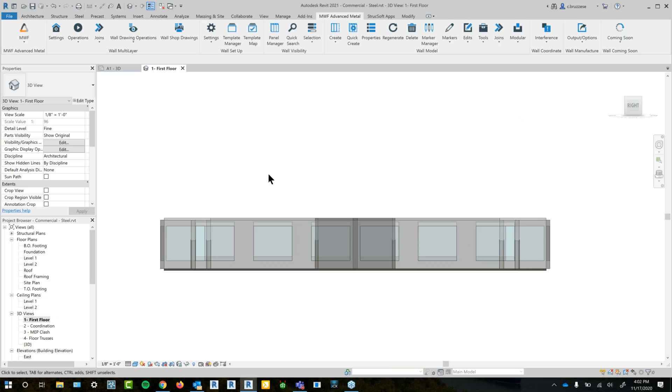So since we are sticking with metal today, I thought we could go over this pretty simple commercial building and go through some of the basics of MWF and how to get started. For anyone who's brand new to the software, MWF stands for Metal Wood Framer.

Like Tanya mentioned, products come in both types. And we basically convert, in this case, I'm going to stick with walls. I'm going to convert some of these walls into panels.

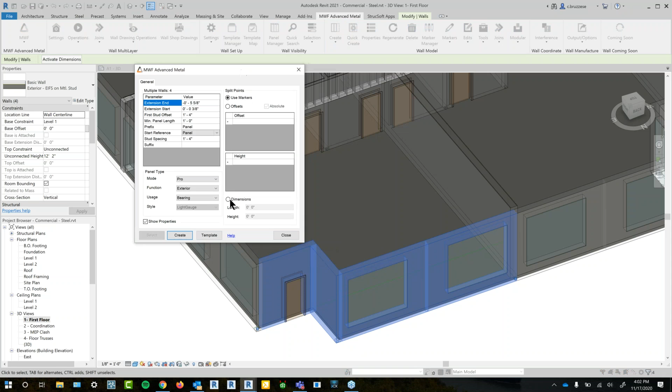So MWF at its core is what we call a template-based software. The idea is that you can take these templates, we'll give you some default ones out of the box with the software, and you can convert these, copy them, customize them, make them your own and build them up to your own standards.

So I've already got some templates set up that I'm just going to go ahead and activate. And when I go ahead and say create, it's going to convert each of these walls into singular panels. It'll do the framing automatically. It's going to recognize the openings that I've got set up in here and frame out according to my templates.

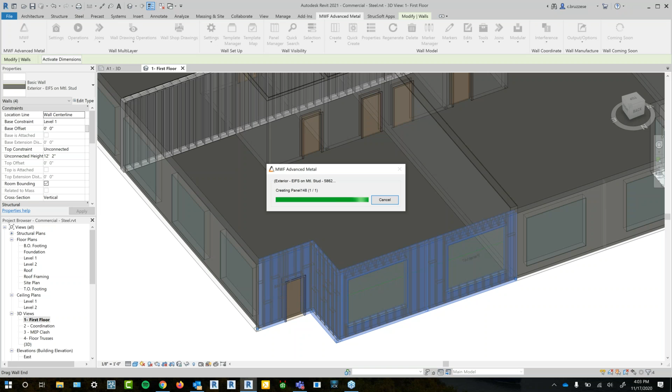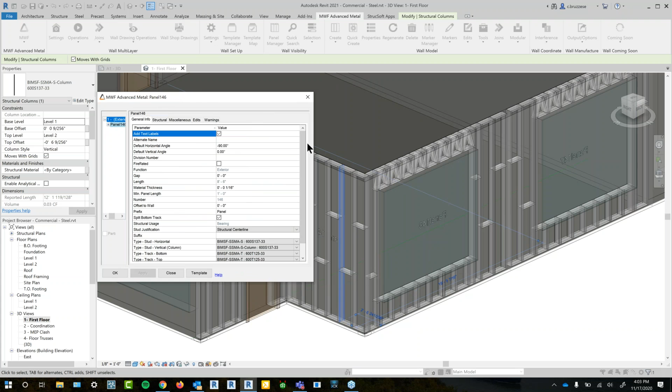So if I just go into the properties, this is basically the main brain of the panel, if I can call it that. And this is exactly what you can save to your template. So we're just in Revit, so you just load in the Revit families that you need, verticals or structural columns, horizontals or structural framing. So you can load those in, choose what you like.

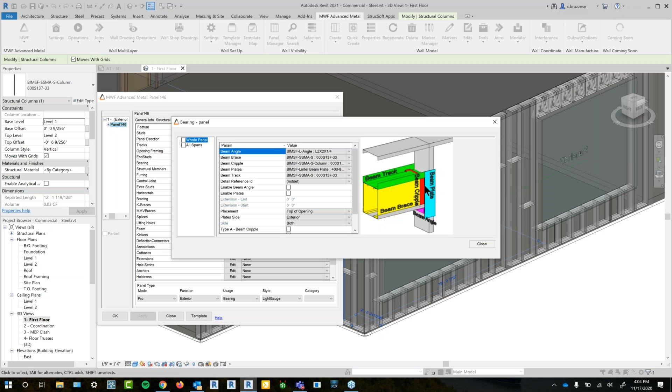And then if we get into some of the metal options, if you wanted to add in bearing headers, something like that, or add in maybe some blocking like I have in these panels here. These are all things that you can customize within MWF, within this properties window.

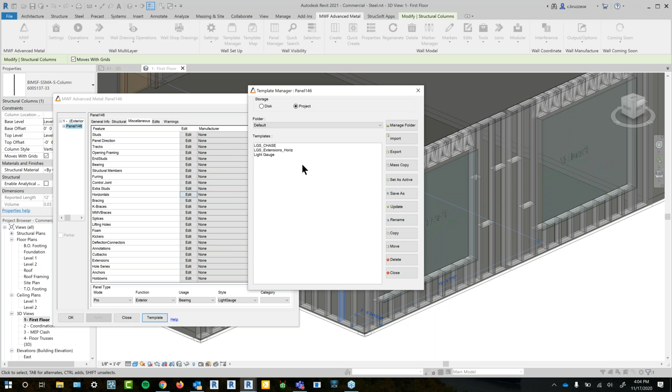And then the idea is that once you have your basics set up in your template, you can go ahead and save this, reuse this throughout the project, and then you can even export this and bring it into other projects.

So that's the basic idea of the software. It's a little bit of legwork at the beginning, but then everything else should be pretty automated.

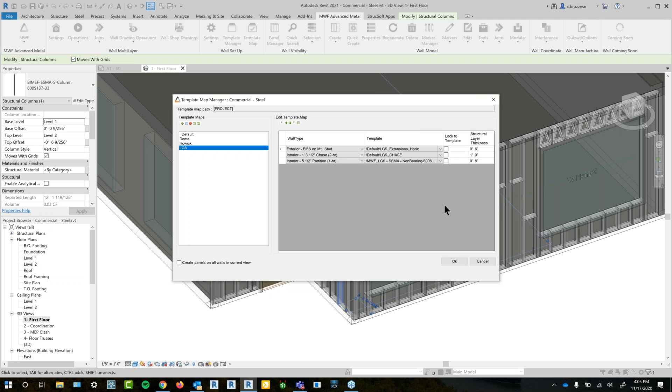And part of that automation is also setting up a feature that we call mapping, and we've got rule sets that you can set up as well. So I can start linking the templates that I've created to my Revit walls. And this is really going to kick in the automation of being able to grab a bunch of different wall types at once. I can use Quick Create, and then it'll all frame out automatically according to my templates and according to that map.

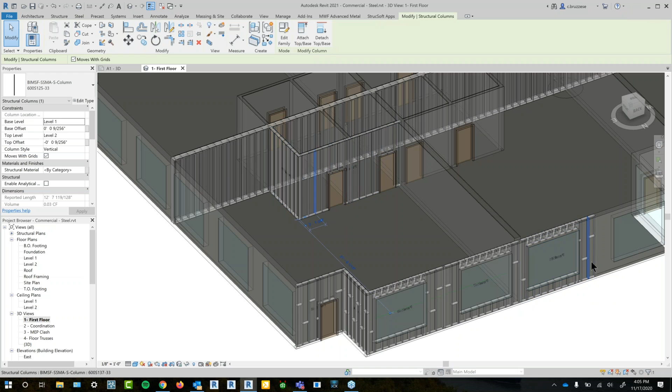So my interior ones and my exterior walls are getting different sizes of studs automatically with that template map setup.

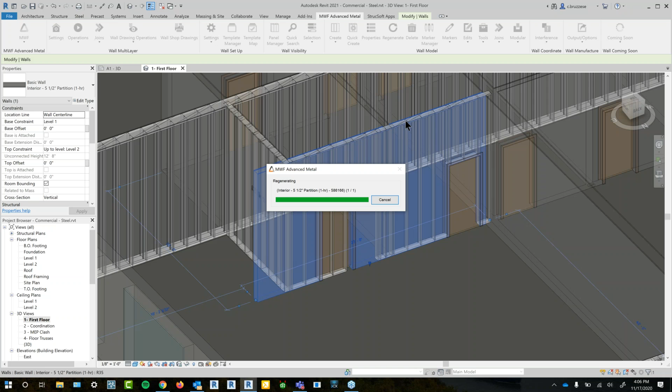Everything is parametric as well. So if you do have to move anything, maybe if I shift my door, if I wanted to change the length of my wall, I can drag it. There's a regenerate feature, which if you already have panels in there, gives your wall a quick refresh and it'll update with those necessary changes. So if anything changes on the fly, you can just give it a refresh and your panels will be up to date.

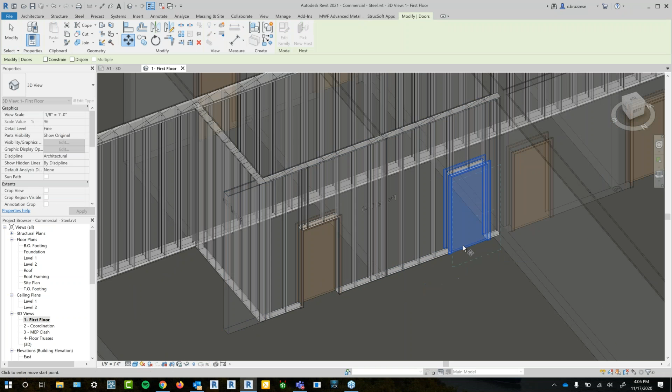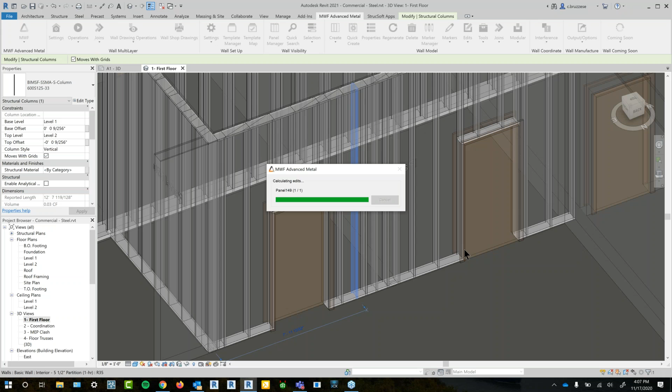So I have been talking about the templates a little bit and how everything can be automated. But since you are still in Revit, you can still do manual changes that you've grown accustomed with. If you want to use a quick copy paste, move some studs around, there is a slew of edits that you can do as well, where once you run our edits commands, it'll save these kinds of changes to the panel.

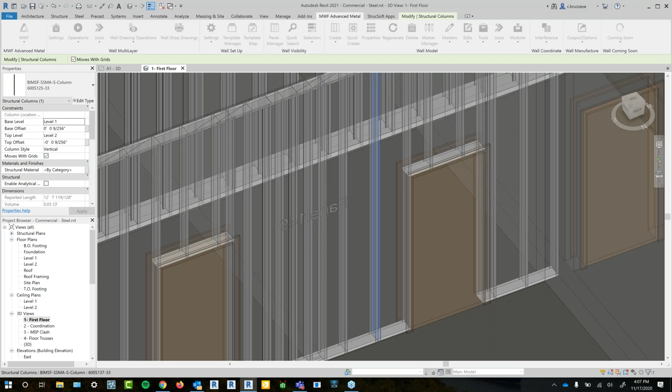I could also do things like maybe use our own edits if I want to quickly double something up. Maybe let's make this back to back. So I can do these kinds of edits. They're savable, they'll be regenerable anytime you move the wall around or change anything that can occur in the model.

And these are individual changes that you can make on the fly as well. So not everything has to be automated. The idea is that you do probably the bulk of the work with those templates, get the bulk of your framing in, and then you could always go in and do a little bit of manual modifications that you need.

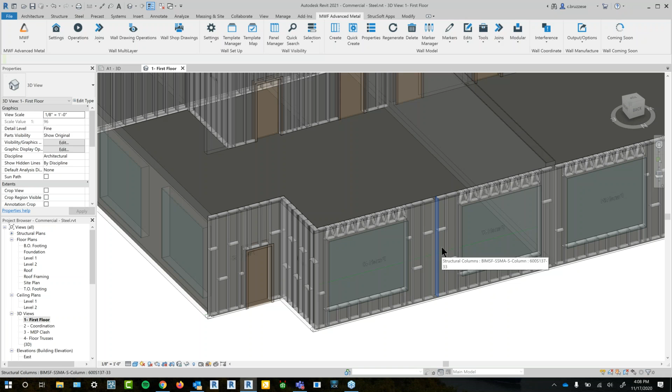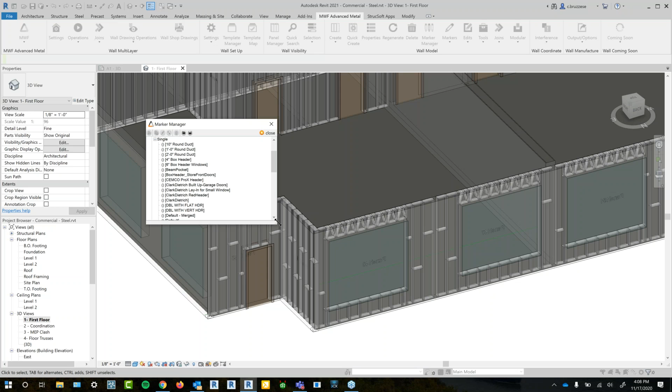The other aspect with the software that I want to talk about is this term that we came up with, called a marker. So you'll probably notice I've got some truss headers already set up. My walls are also joined together, and those are done with something that we bring into the software that comes preloaded, and that's called a marker. So it's basically preloaded information, kind of like the templates that you can duplicate, customize, and make your own.

So a good example is my standard truss header that I have here. It's just a marker that I've taken and I can duplicate and customize. I can choose the sizing of the families. I've got clearance options. I can choose the positioning of the cripples if I want it between the V's, inside the V's. So you can kind of customize this.

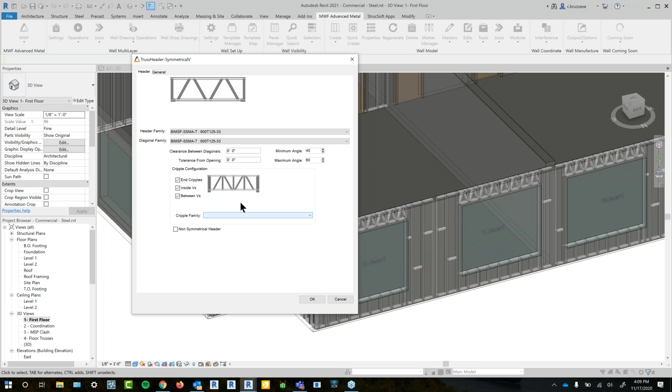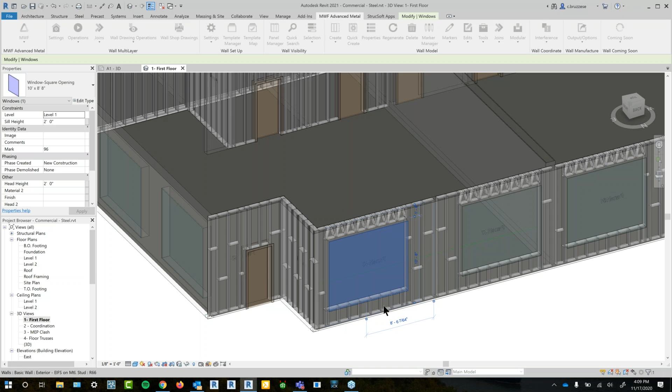And then all you have to do is grab your openings, apply it, and it'll take on that header configuration automatically. Same idea with it being regenerable. If I want to change this header on the fly, maybe put a box header in there instead, I can always go change that, give it a quick refresh, and then my panel updates with the new information.

So again, big picture with the software, you get your templates set up, you get your markers set up, and then the majority of the framing really should be done for you.

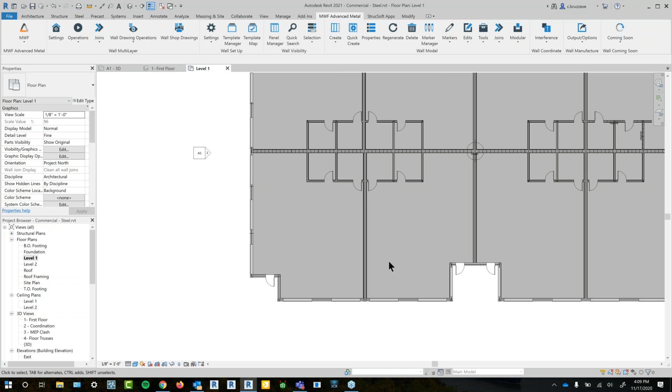With the opening markers in particular, I've kind of just been manually applying them, but if you do want to create rules, get that a little bit more, basically create them with a bit more intelligence. And then we do have rule sets that, again, you can build into your templates and it'll automate it just that much faster. So I can make rules for windows, let's say, that are 4 to 6 feet wide.

I can go so far as to say if they're on a specific level or in a specific Revit wall. And I can go ahead and create this rule, save it to my template, and then once I blanket create my building, all of my headers and opening conditions will be framed out automatically.

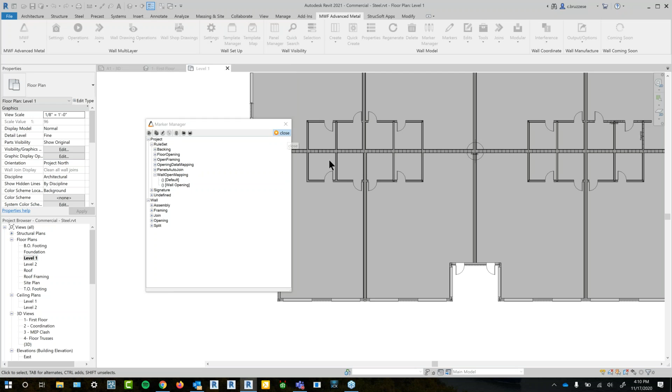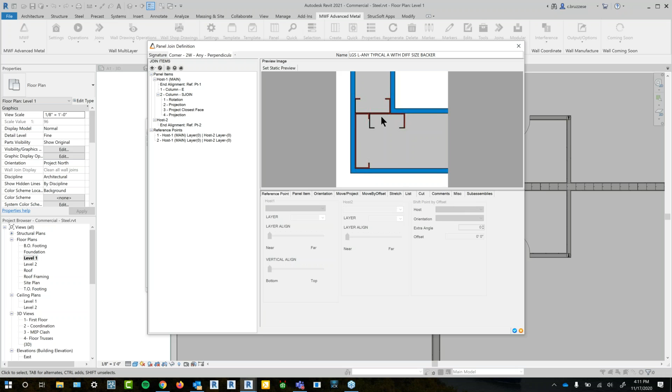So the joins that we use to join the wall panels together also have that similar kind of idea. They're preloaded information, so if you do have any kind of custom join conditions, chances are they come out of the box with the software, but we could always make these as well. These are super easy to customize, and you could always load them in.

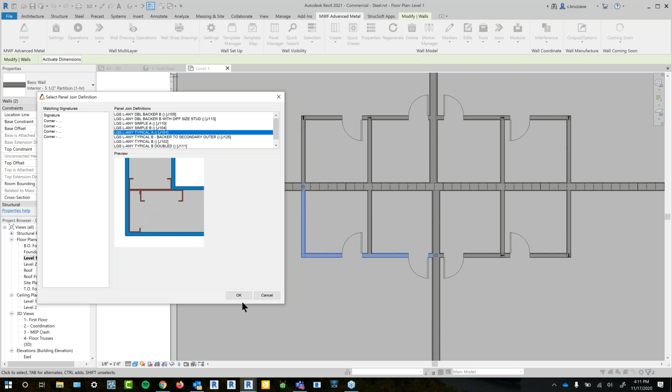And again, I can just grab a corner, place a join. It filters out that I've got a corner selected automatically and gives me the list to choose from of how I want that corner to frame. So maybe I'll pick one with this backer. I can say, okay, that's where I've got these arrows set up. It's just to designate that there's a join there.

And then as soon as you create these panels, you'll have that join configuration in there automatically, and you'll be good to go.

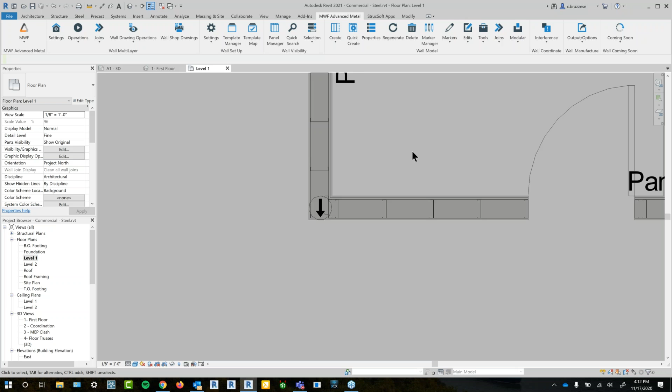So that is the framing portion in a nutshell, I'd say, at least in terms of the walls. It's really just getting your templates and your rules set up, and then you're pretty much free to grab your walls, say create. 90% of the framing should be done automatically according to the rules that you have set up. And then, of course, everything is exportable. If you reuse a lot of the same standards, you can bring that into other projects.

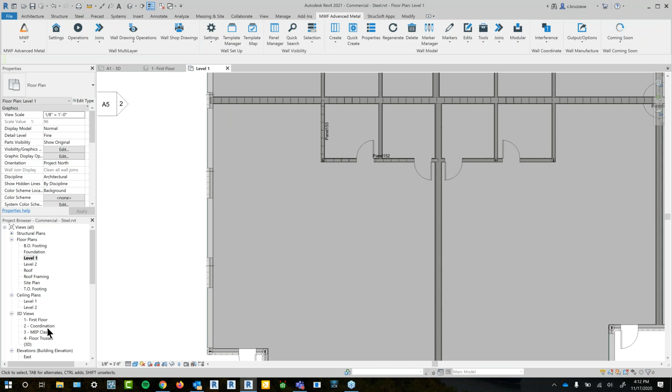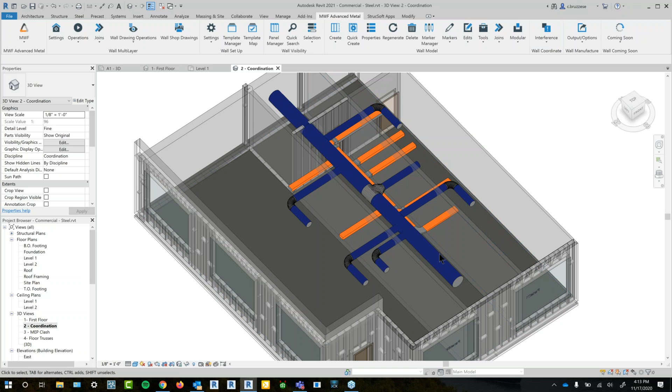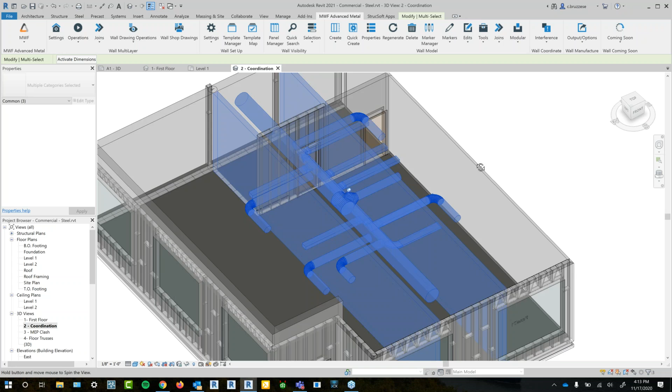Another aspect of the software we should take a look at today is coordination. This is another tool we have where if you have MEP or generic objects, a structural link, pretty much any type of object, you can bring that into your existing Revit model. In this case I have a link set up, and I can run our clash detection tool, which will look at the wall penetrations I've set up and create the openings for me automatically.

Anything on this list works, and as long as your link is three-dimensional, has coordinates, some kind of volume, and Revit can bring it in, we can pretty much work with that.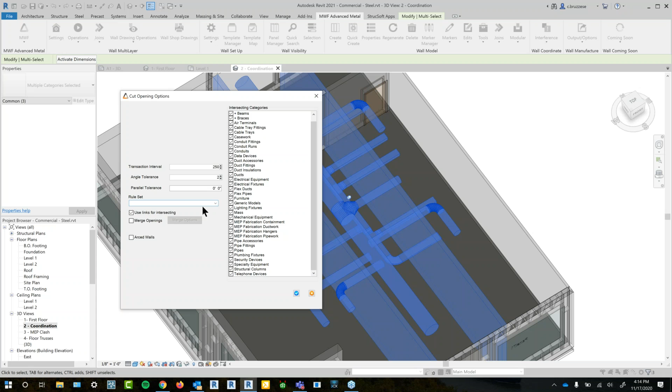I'm going to go ahead and pick my rule set, which I'll touch on in a minute. But as soon as I let this run, it's really fairly quick. It's just going to punch out the ducts that I've linked in with these Revit wall openings, and this is another opening type that we can recognize like we would a window or a door.

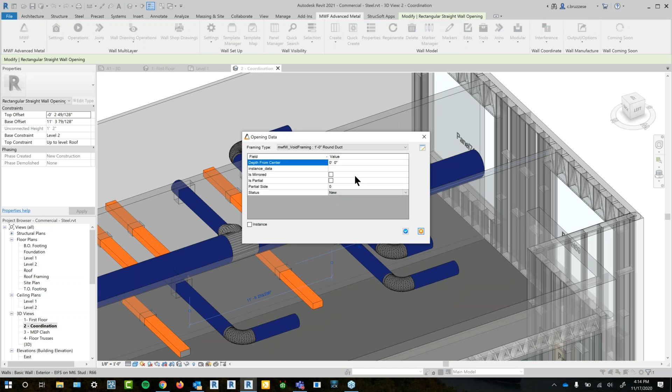It's also automatically stamped with a marker, which feeds into that automation and the rule set idea we have, where I've essentially set this up based on the size of my duct. So anything, in this case that's 6 to 10 inches wide, gets a 1-inch tolerance and a specific marker type.

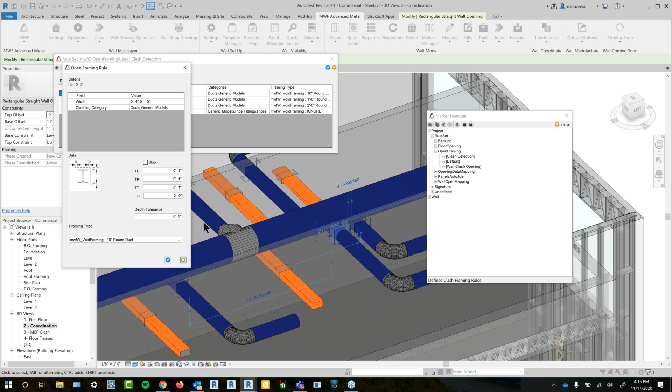Once that's set up, I can pretty much go ahead and grab these and frame it out like I would any other opening.

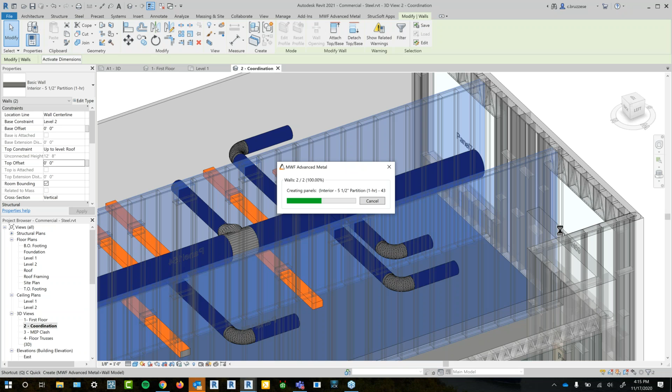With this interference tool, once everything is framed out, it will just frame like we would any other opening. But once you run clash detection, there are options to review these openings.

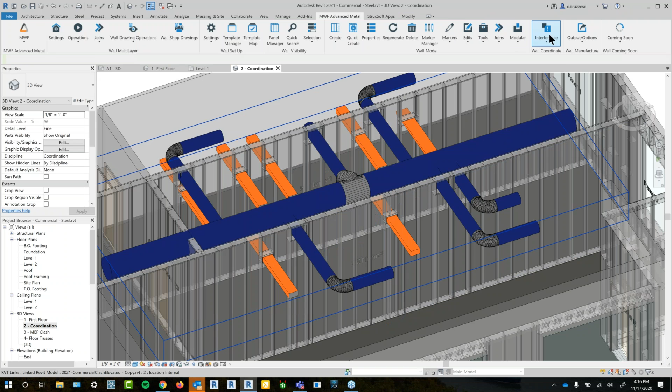If I don't have anything selected and I go ahead and look at the report, it'll show me all of the openings that were created and highlight it for me in the project. I could also select the host, which will grab the wall type itself. So I do have options to review and cover my openings as they've been created.

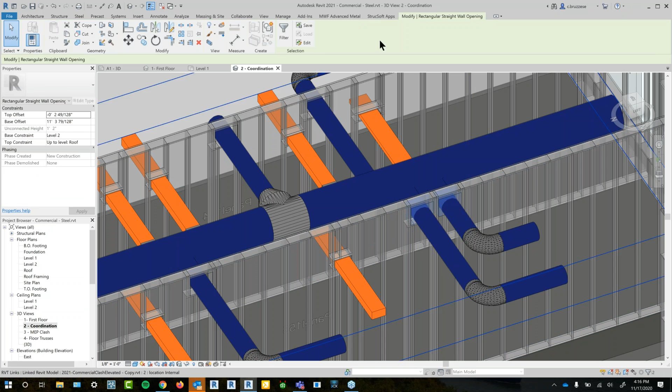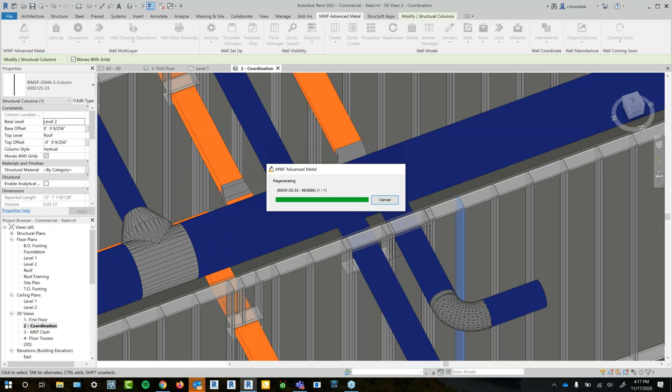And if I notice that maybe two openings are a little close together, I also have options to merge these, and I can bring them into one larger opening. Once I give that a quick refresh, it'll just frame out like normal.

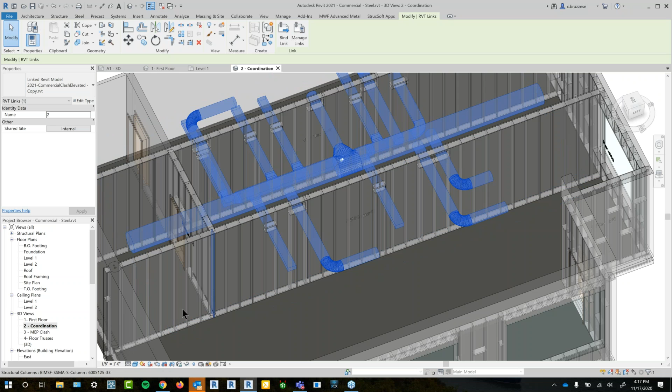So this is one tool you can use for coordination purposes, to bring in your MEP structural links. Another tool I wanted to touch on, which is newer and pretty cool, is the MEP Clash. If you have piping or electrical running through your studs, and you're planning on sending this to a roll former, we have an option that'll automatically put the punches in there.

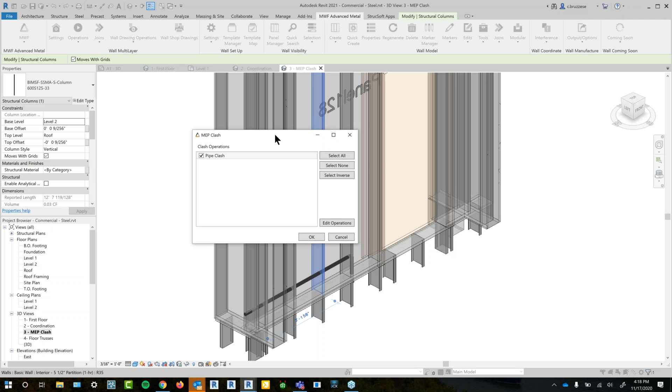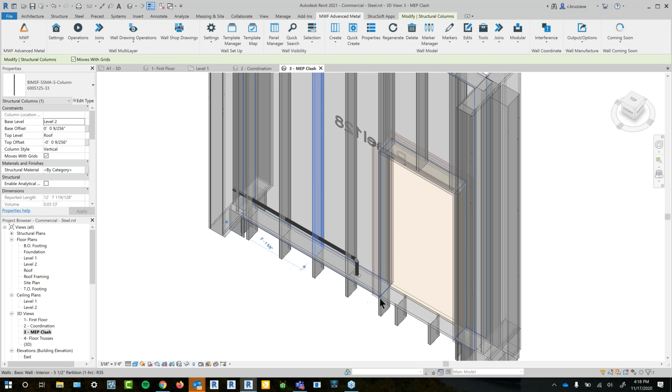You'll be able to see them modeled, and when you actually send this to your roll former, it'll be picked up by the CNC. This is just a pipe that I've modeled myself with Revit. I have it set up automatically, but pretty much anywhere that pipe runs, even through my piece of track over here, it gets punched out with a hole automatically.

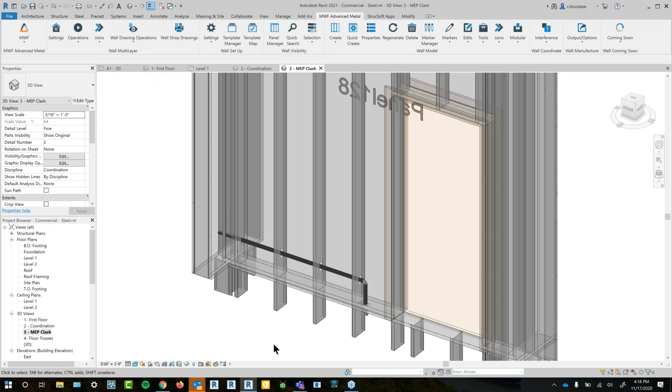So a nice little feature, and this is something that'll be visible if ever you upload these panels to Onyx, or if you send this to be rolled to CNC.

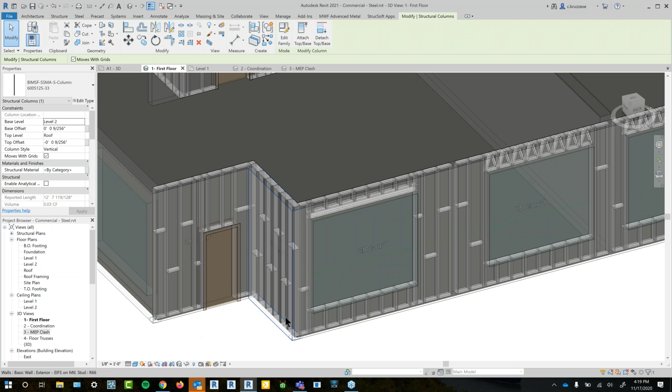Before we move on to the floors and maybe some of the trusses, as I've mentioned with CNC, one thing you can use MWF for is production work. I've been framing these out as singular walls per panel, but we do have options for panelization.

One of the first ones are these split markers. This is another tool in the software where if you receive a model with maybe an 84'0" length wall, like I have in this case...

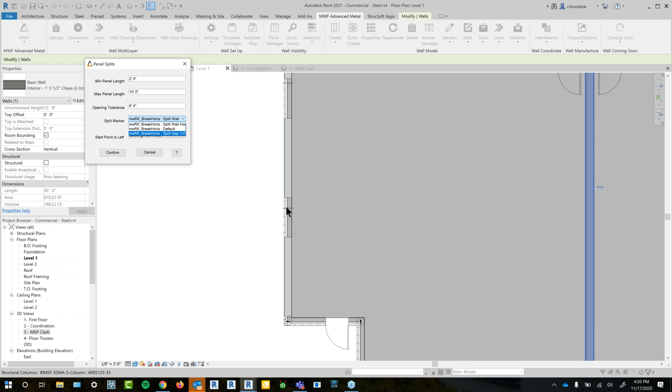We have options where I can pre-split these walls with the software. I can put in my maximum panel length, any kind of minimums, and we basically put in the split marker, which you can already see in this wall here, telling the panel exactly where to break. I've already placed it in here, and the marker itself also has a 1/2 inch gap considered, so when my panel goes and frames, I'll have that 1/2 inch gap in between my end studs.

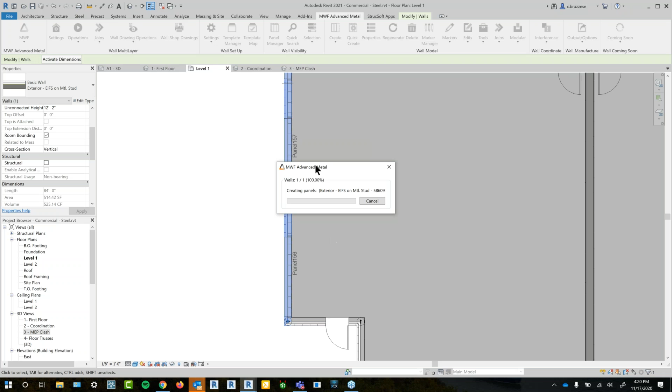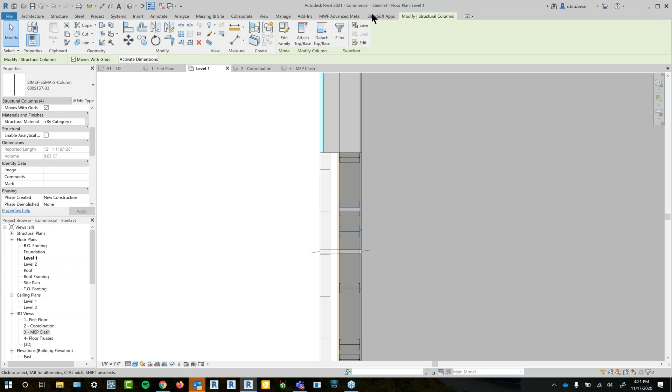So you can see here, I have a few panels already set up. It's going to break exactly where my marker is. And again, everything's regenerable. So if you do go ahead and drop in your split markers, maybe it's a little too close to your window, it's not in a great spot. You could, of course, always move these, give your panel a regen, and it'll go ahead and snap to the new location.

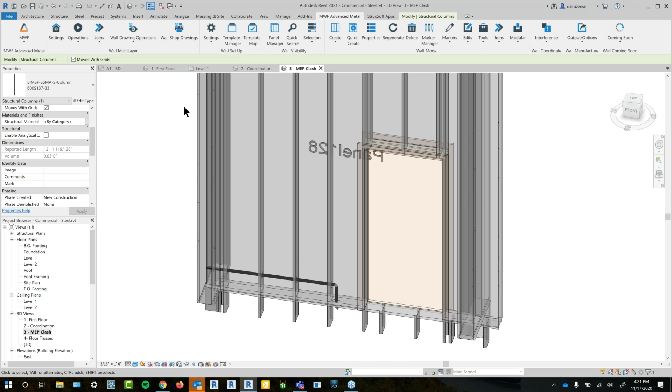So that's one thing a bit more geared towards production. And last thing I want to touch on, of course, again, leaning towards production, is the shop drawings. So the shop drawings, once you have your standard setup and all the views that you want to see in there, you can blanket select your project and it'll create one panel per sheet.

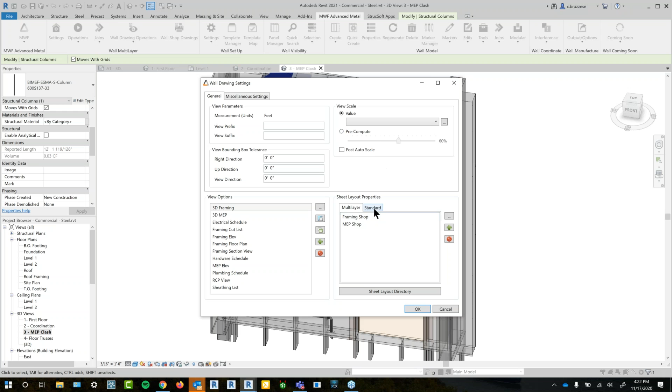So just to give you an idea for my shop drawings setup today, I basically have my framing elevation, my cut lists. I can add section views. We also use Revit Schedules, which I'll talk about in a little bit. But basically you can customize these shop drawings however you'd like.

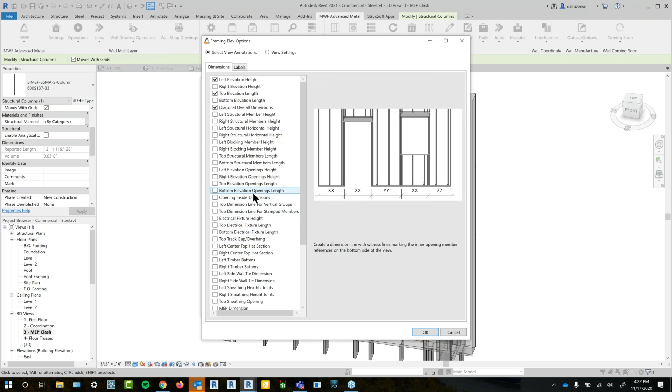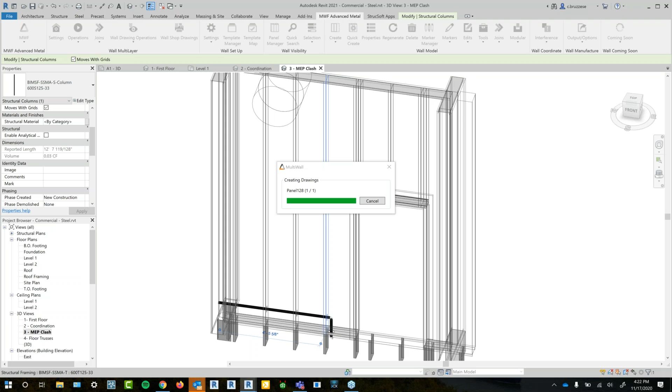If I go into my framing elevation, I'm able to pick what kind of dimensions I want to see. I can choose how my members are labeled. Basically set up all of my corresponding views. And then I just have to let this generate, grab my panels, and it'll throw in that one panel per sheet, all of my dimensions, and everything will be done automatically.

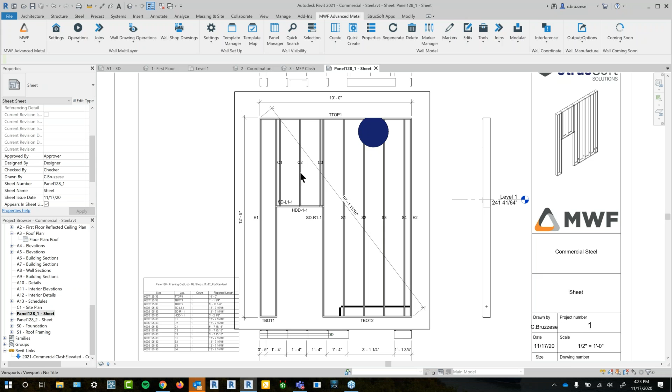So just to give you an idea, I also had my MEP visible in this one wall, so I can see exactly what's going on. But all of my studs are labeled, everything's dimensioned. Top and bottom views could also include section views of your wall. And I also have a full cut list off to the side. That's calculated and placed on the sheet automatically per panel.

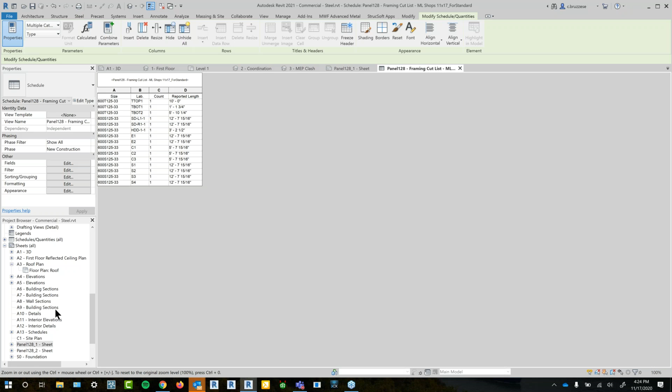And I did mention Revit Schedules. All of our build materials can now be used as a Revit schedule. And for anyone who's familiar with Revit Schedules, you know how powerful this can be. So you can set up pretty much any kind of parameter that you want to see in there. You can create a master that we use and we'll apply our own filters and run them per panel.

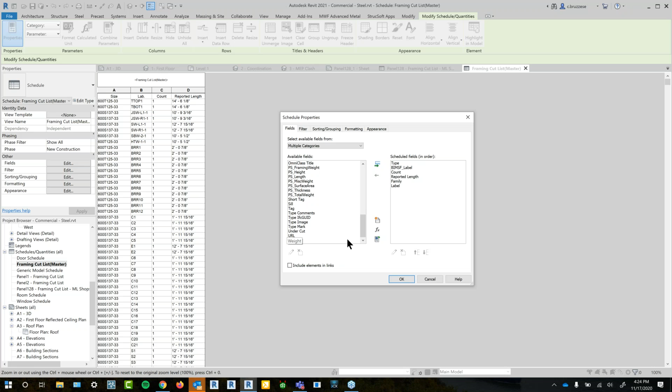But if you wanted to add weights, if there's a cost associated per length that you wanted to add in, you can basically set up this big master schedule, and we use these in our shop drawings, add in our own filters, and apply it per panel. So that's a great feature that you can use to quantify everything in your project.

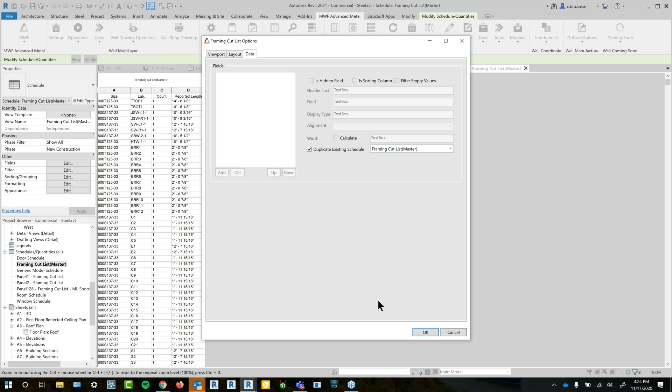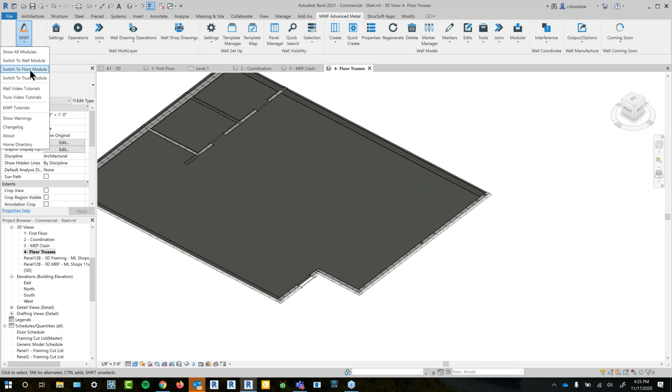So for the last 5 or so minutes, I'm just going to touch quickly on the floors and some of the trusses. And thankfully, it's very, very similar to the walls. It's all template based. So you just have to go ahead and make your templates, and you can associate that to your floors.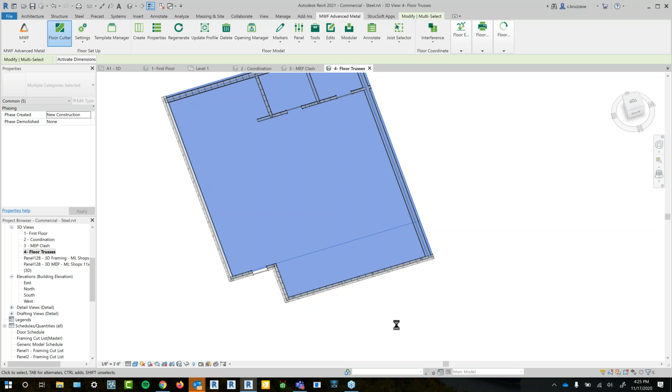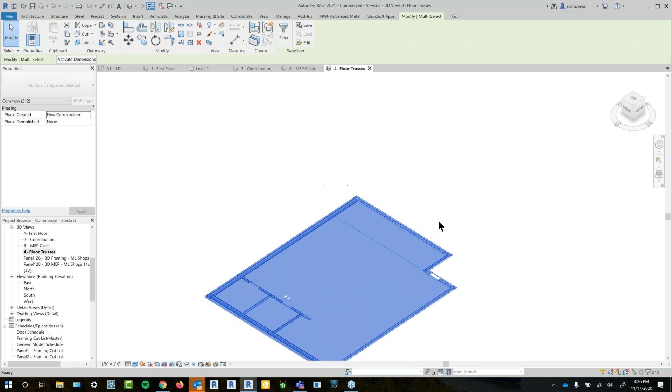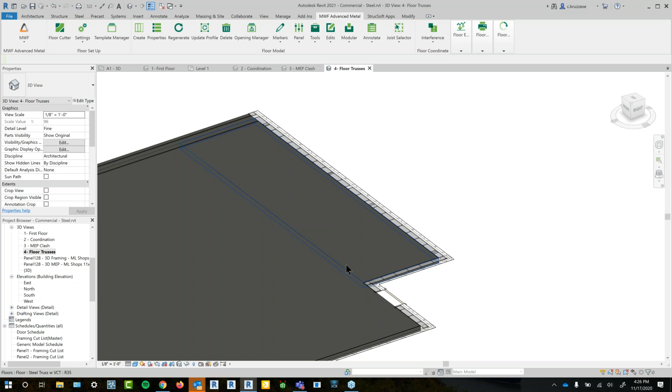So one thing I do just want to show off quickly is this floor cutter tool. So if you do have a really large floor, that's how you receive it in a model. I actually just have a model line running across here, and it's basically just going to break these up into 2 usable pieces. So let me go ahead and just grab my floor. There we go. And let's run the floor cutter. So I've now got this more manageable piece that I can then go ahead and convert into a panel.

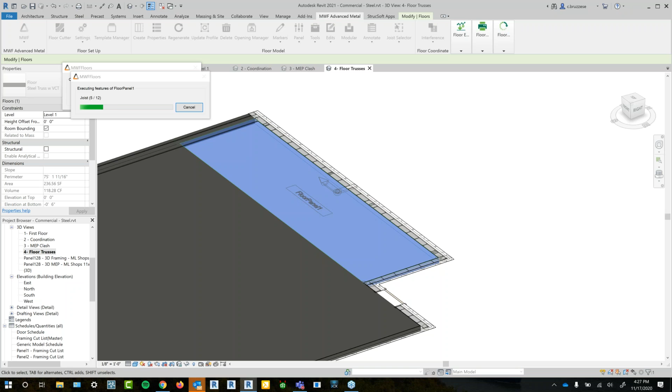And for today, I thought we would just go ahead and quickly make some floor trusses. But this works just the same if you need to place regular light gauge joists. So I am working in Advanced Metal today. And Advanced Metal does have a fairly powerful engine if ever you wanted to design your own trusses. So I'm just going to quickly lay out these floor trusses, and then I can double back and always run analysis. I'll be able to generate PDF reports. And according to my loading standards, it's essentially going to let me know if my trusses pass or fail.

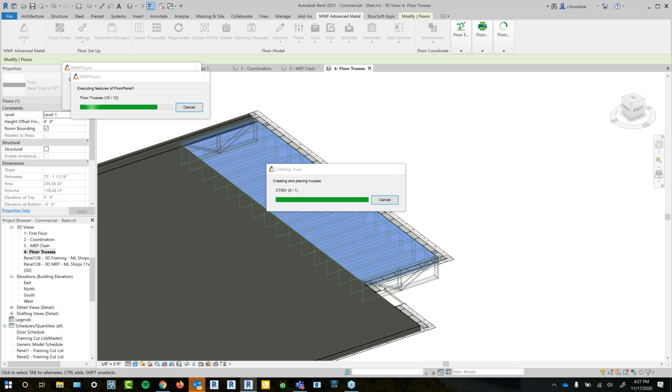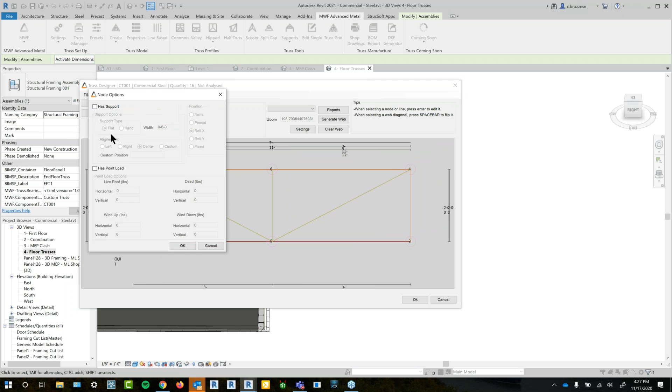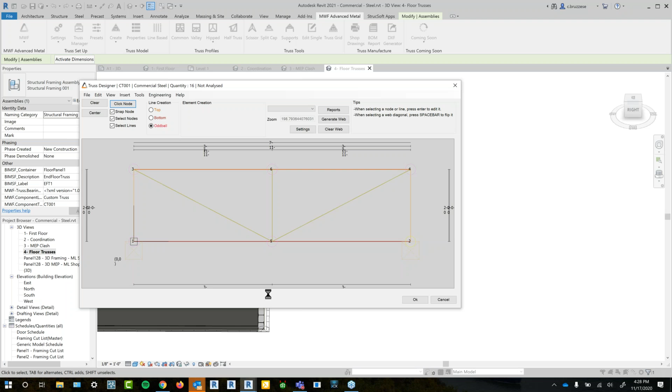So I'm going to go ahead and quickly switch over to the truss module. And then I'm able to prompt these in our truss designer. And I can go ahead and run analysis on these trusses. So right now, all I've done is added some supports. I'm just going to assume a simply supported truss. Quickly running analysis on it, and it's just going to tell me if it passes or fails. In this case, I have a failure. I'm not too surprised.

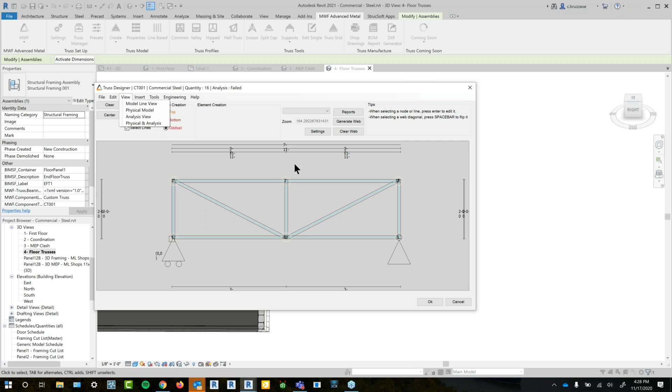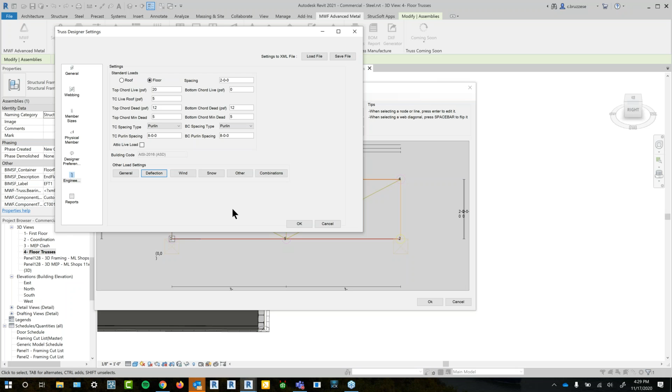But we do have options that'll let us go look at the analysis view. I can always take a look at the physical view as well to get a better understanding of what's going on inside this truss. So just a quick little summary on the coding. AISI 2016, all the loading is applied through here. You can customize your deflections, run this through your analysis, and then again, you can see if your trusses have passed or failed.